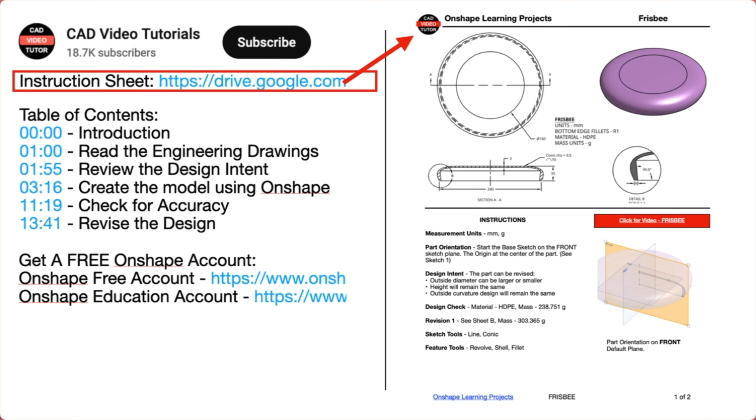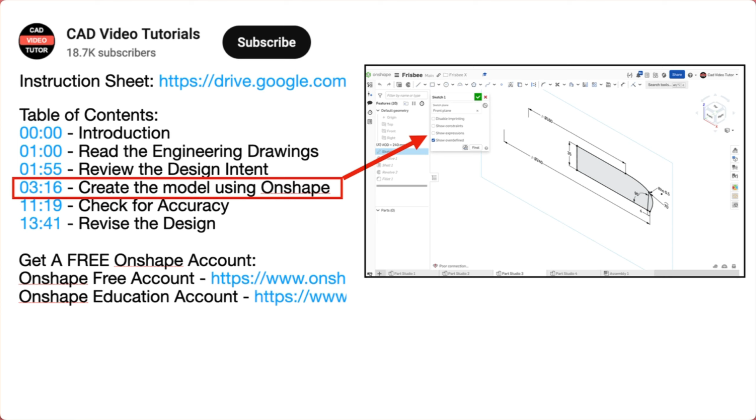The video instruction is organized into 5 segments. In Segment 1, you will read the engineering drawings. Segment 2 will establish the design intent. In Segment 3, you will create the part model using Onshape. Next, you will check the accuracy of your model by checking its mass properties. Last, you will check the design intent by making changes to the model to see if it will update correctly. Now you are ready to begin the project.

In this segment, we'll read the engineering drawing for this Frisbee. Let's start by identifying the views provided in the drawings. First, there is an isometric view showing the Frisbee as a 3-dimensional pictorial. Next, 2 orthographic views. On the upper left is a top view. Aligned below this is a front view.

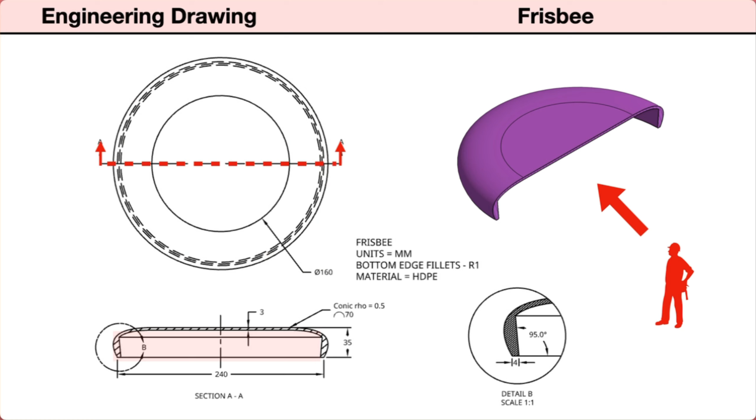This view is displayed as a section view, showing the Frisbee cut in half, exposing an interior profile of the part. The cutting plane line in the top view identifies the location and direction of the section view. To the right is a detail view. This shows an enlarged view of the front section, allowing us to view the details of the curved outer edge.

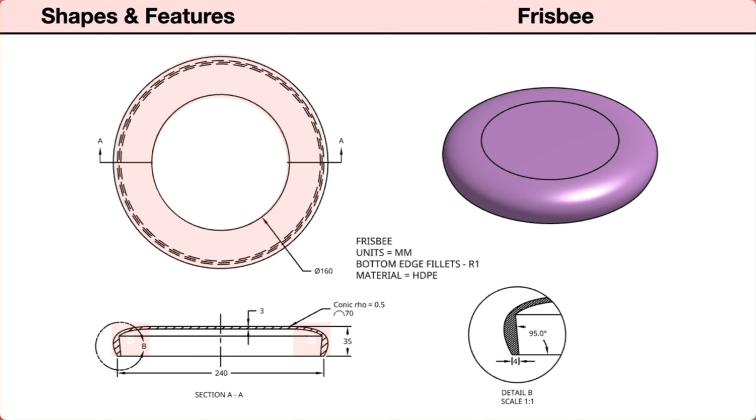When planning a parametric model, we first need to identify its basic shapes and included features. The top view shows the Frisbee has a circular shape. The central area is concentric and flat with a uniform thickness. The front section and detail view shows the outer portion as curved but not uniform in thickness. The bottom edges are rounded, forming small fillets.

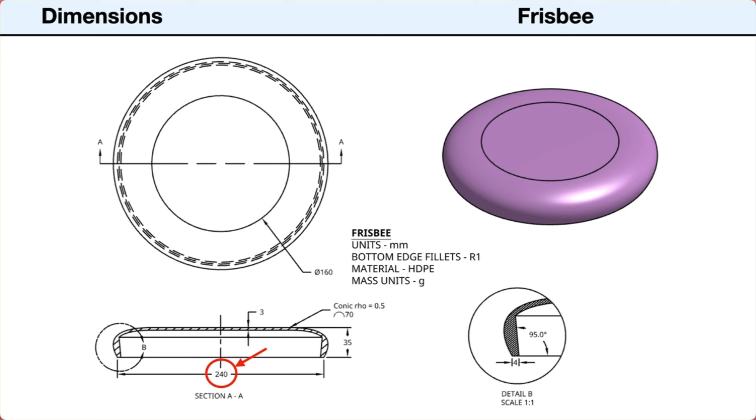Next, we'll look at the dimensions and notes. First, the dimensions are in millimeters. The dimensions in the top view tell us that the flat circular center area of the Frisbee has a diameter of 160 millimeters. The front view shows the height of the Frisbee is 35 millimeters. The bottom outside edge has a diameter of 240 millimeters. The top part has a thickness of 3 millimeters.

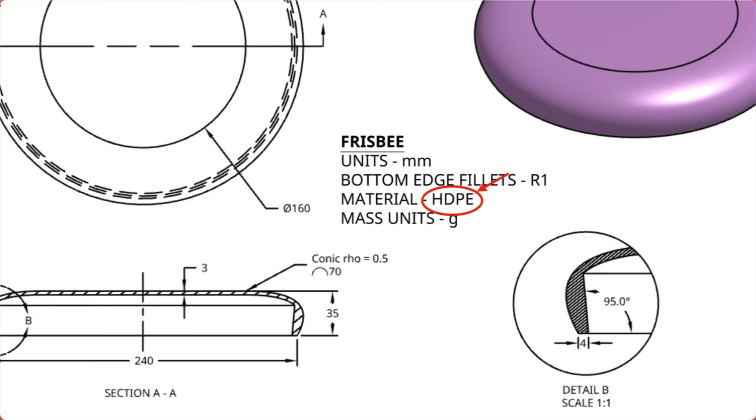The outside curve is a conic arc with a rho value of 0.5, which makes it a parabolic curve and has arc value of 70. The detail view shows the bottom edge with a width of 4 millimeters, and the inside edge angled at 95 degrees. The bottom edges are rounded with a 1 millimeter radius fillet. The material is HDPE, high-density polyethylene. The mass units are in grams.

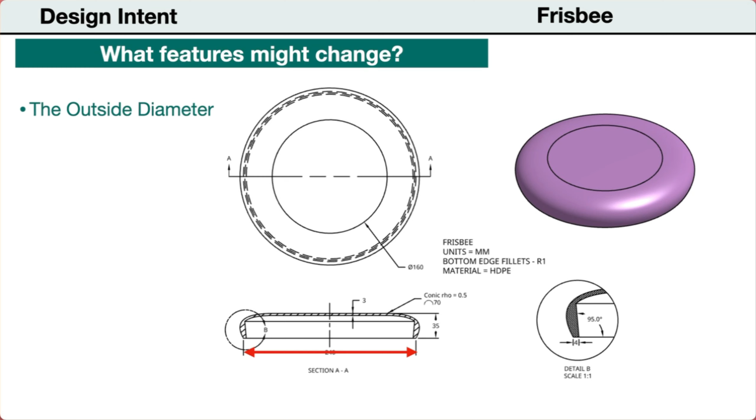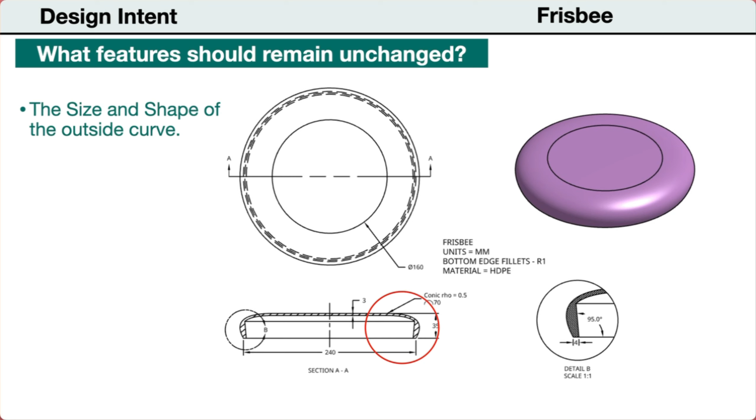Next, let's establish our design intent. To start, we need to identify any features that might be changed during the design process. We might want to make the Frisbee larger or smaller by changing the outside diameter. When the outside diameter changes, we want the inside flat diameter to change by the same amount. So which features should not be changed when the part is revised? The shape and size of the curve on the outside edge, and the material thickness.

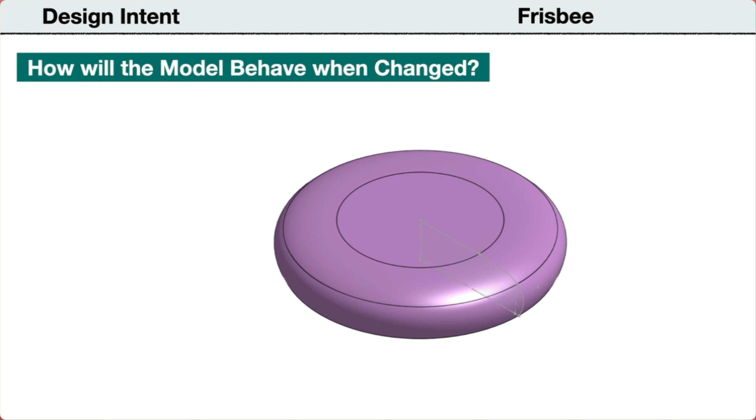So how do we want the part to behave when these parameters are changed? If the outside diameter is increased, or if the outside diameter is reduced, both the outside diameter and the inside flat diameter will change by the same amount. The outside curve will remain the same, and the Frisbee will update without errors.

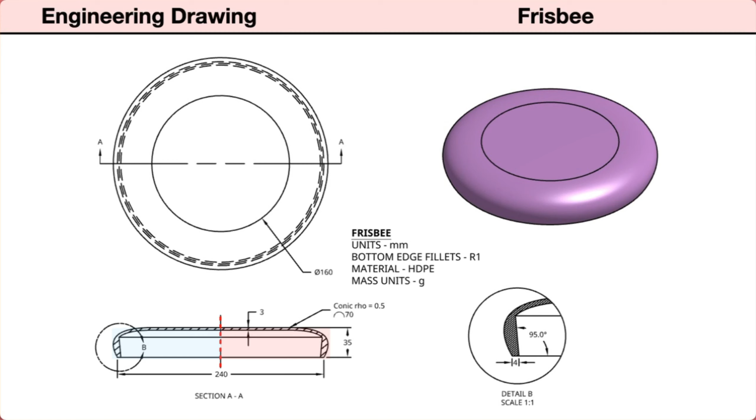Before we model the part in Onshape, let's preview the steps in the modeling process. First, from the drawing, we will identify the profile we will use for the base sketch. Because this part is circular and symmetrical, we can use half of this front section profile as our base sketch. We will place this on the front sketch plane, with the origin at the center.

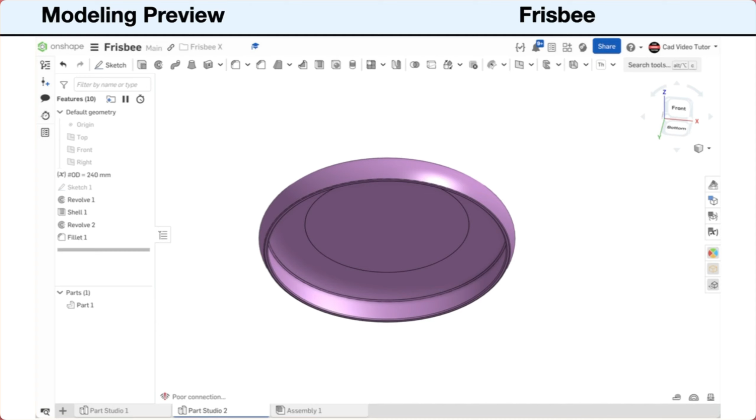We will use the sketch to revolve the Frisbee first as a solid part. We can then use shell to hollow out the inside to a uniform thickness. We will use sketch 1 again with revolve to add the extra thickness and angled inside around the edge. Last, use fillet to round the corners on the bottom edges, resulting in the finished part.

So now let's get started in creating the Frisbee. I have started a new Onshape document and named it Frisbee. The workspace units are set to millimeters and the mass is set to grams.

Start a new sketch and choose the front sketch plane. Use N to view the sketch normal to the screen. Use P to turn off the visibility of the sketch planes. We will start with a construction line at the center of the part. Click on Line and Construction. Click on the origin to start the line and stretch it vertical. Enter 35 millimeters for the height.

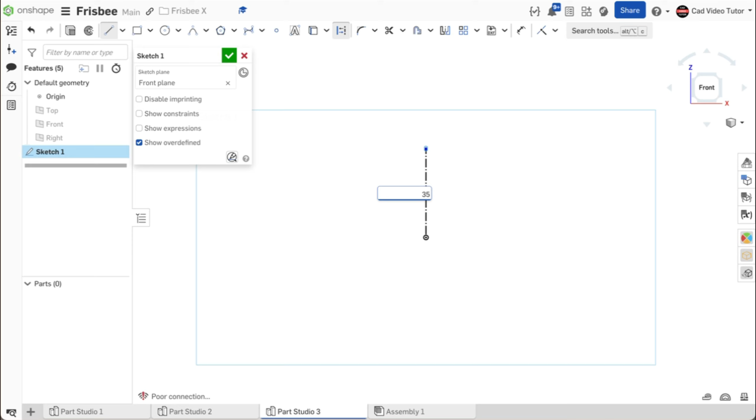Right-click and End Line. Now, click on Line from the Sketch toolbar. Click Coincident to the origin and stretch a line to the left for the bottom edge. Right-click and End Line. Use the dimension tool and click on the end of the line and then the center line. Move the mouse to the left of the center line and click for the diameter. Enter 240 millimeters for the diameter.

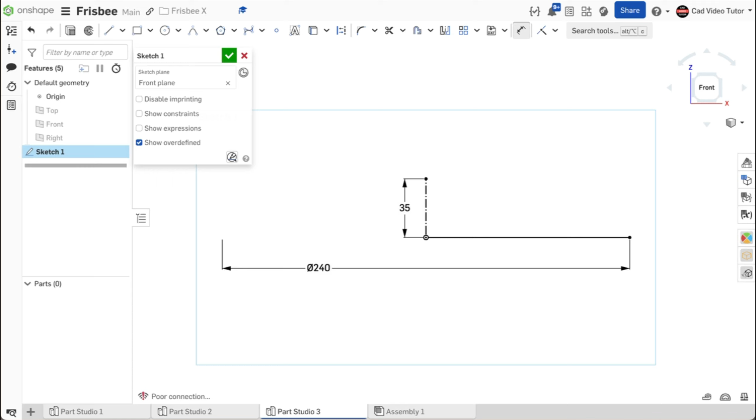We know from our design intent that this diameter may change, so let's set it as a variable. Double-click on the dimension and then use hashtag from the keyboard. Click on New Variable. Enter the name as OD for outside diameter. Use the green check to close. Use Enter to apply the variable to the dimension.

Now for the horizontal line at the top of the Frisbee. Click on Line and start coincident with the top point of the center line. Stretch the line to the left. Right-click and End Line. Use the Dimension tool. Use the center line to also set this value as a diameter. Enter 160 millimeters. This line will also be variable, but it should change by the same amount as the OD variable when it is changed.

We can set this relationship with a formula. Double-click on this dimension and enter hashtag from the keyboard. Choose OD from the variable list. This line is 160 millimeters, which is 80 millimeters smaller than the OD. So after the OD variable, enter minus 80 millimeters. Use Enter to apply the formula. Now as we change the OD variable, this line will also change, maintaining the relationship.

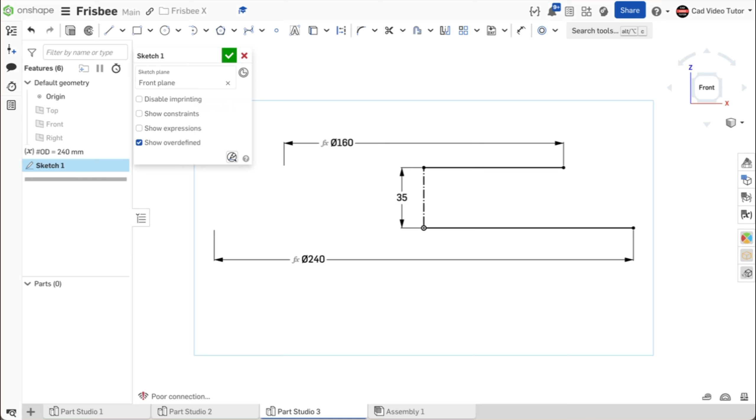Now we can create the conic arc that makes the curve on the outside. From the Sketch toolbar, choose Conic from the Arc drop-down menu. Click coincident to the end of the top line and coincident to the end of the bottom line. Stretch the arc outward and look for a horizontal icon and the rho value to be 0.5. Click to set the arc and use Enter to accept the rho value.

Now we can sketch the angled line that will add thickness to the inside edge. Click on Line and then coincident to the bottom line near the outside edge, and end coincident to the curve. Use the Dimension tool to set the distance from the outside edge at 4 millimeters. Set the angle to 95 degrees.

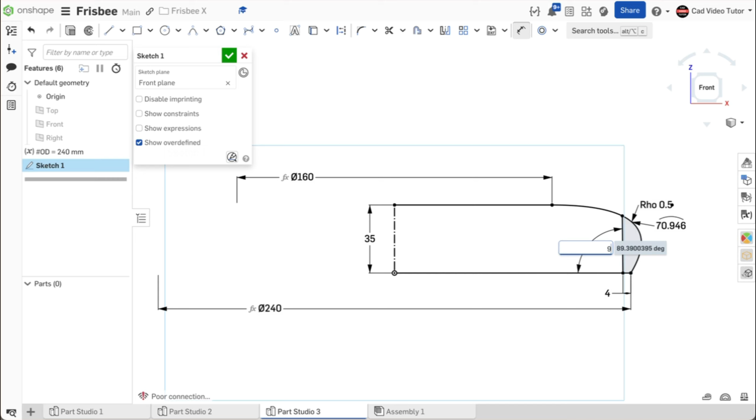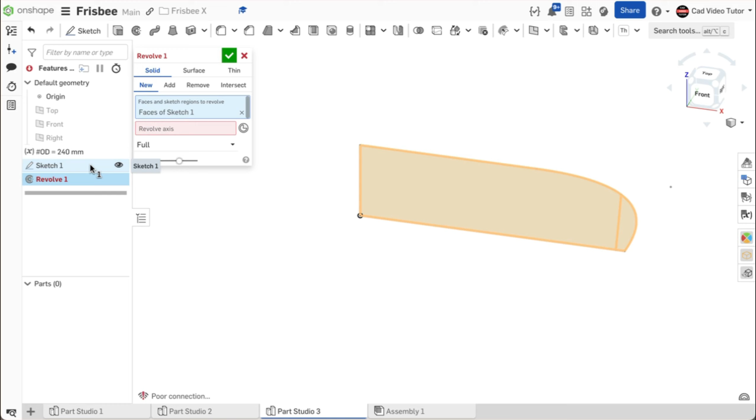Last, to use this sketch for our first revolve, we need to close the region. Use a line to connect the ends at the center. This looks right. Use the green check to close. We can now use this base sketch to revolve a solid Frisbee shape. Click on Revolve on the Feature toolbar. For the sketch region, click on Sketch 1 from the feature list. For the revolve axis, click on the line at the center. This looks good. Use the green check to close.

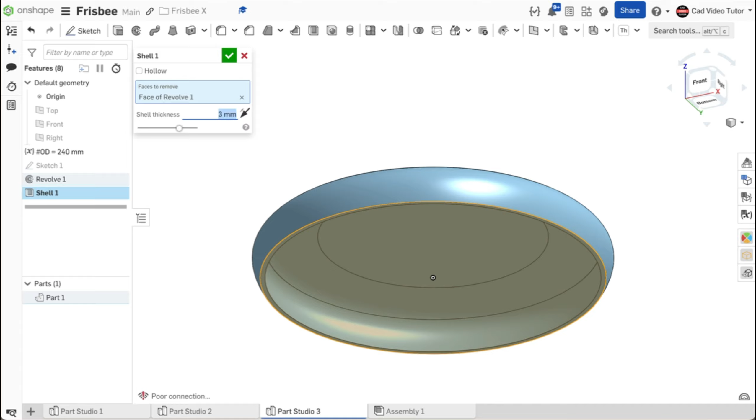We can now use Shell to hollow out the inside and create a uniform thickness. Click on Shell on the Feature toolbar. For the face to remove, click on the bottom face of the Frisbee. For the shell thickness, enter 3 millimeters. This looks correct. Use the green check to close.

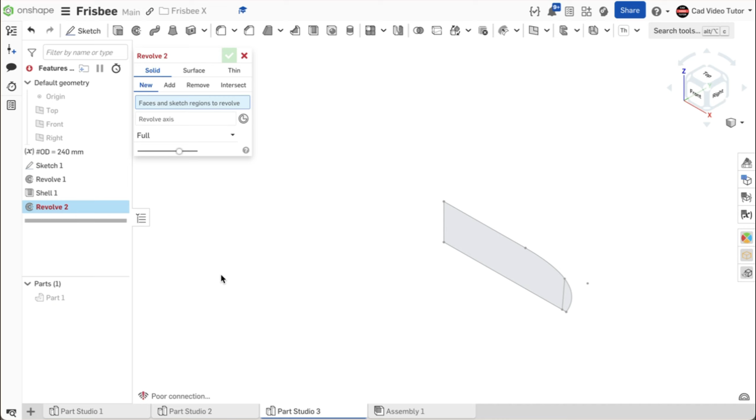To add the material for the angled inside face of the Frisbee, we will use another revolve. Click on Revolve on the Feature toolbar. Click on the eye on Sketch 1 on the feature list to turn on its visibility. Click on the eye on the part in the parts list to turn off its visibility so we can see the sketch. Now, click on the region of the sketch with the angled line.

For the revolve axis, click on the line at the center of the sketch. Click on Add to join this with the existing part. Turn on the visibility of the part. Check the box for Merge with All.

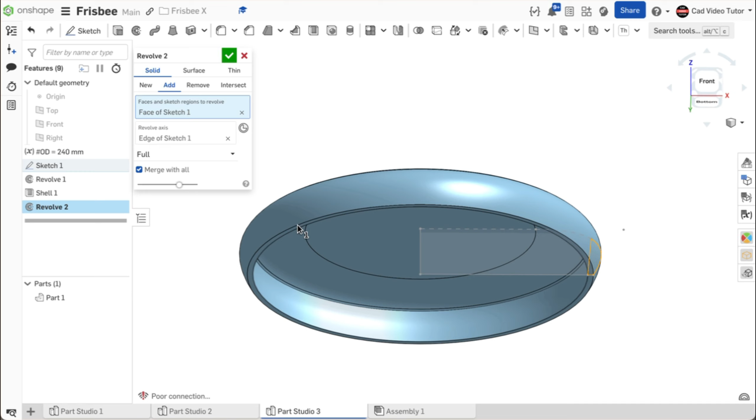This looks like what I want. Use the green check to close. Last, we need to round the bottom edges using a fillet.

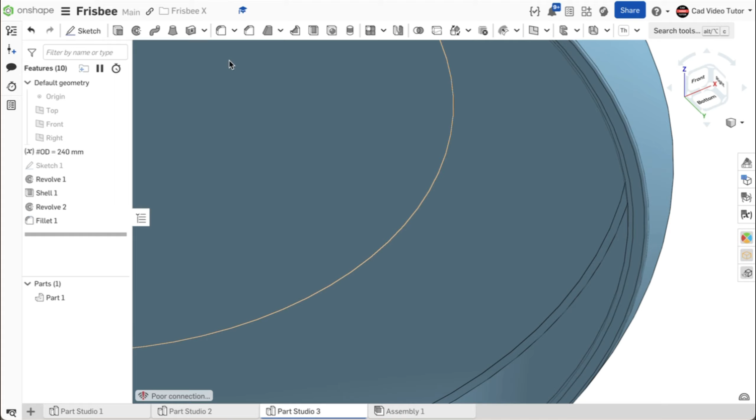Click on Fillet on the Feature toolbar. Set the fillet radius at 1 millimeter. Click on each of the bottom edges of the Frisbee to round them. Use the green check to close. This looks good. The model of the Frisbee is now complete.

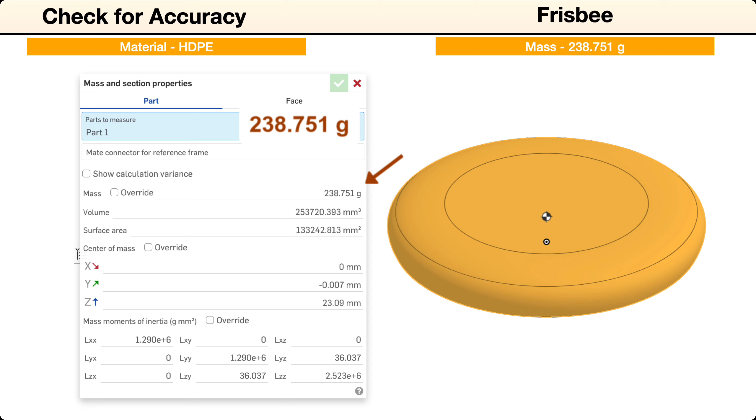In this segment, we'll check the accuracy of the model by checking its mass properties. To check the model, the mass units should be set to grams and the material set to HDPE plastic. If the size and shape of your model was completed accurately, the mass should be 238.751 grams. Let's look at this process step by step.

First, open the document that contains the model of the Frisbee. Next, check the workspace units and make sure that mass was set to grams. Next, set the material to HDPE, high-density polyethylene. Go to the part in the parts list. Right-click and choose Assign Material. In this case, we're searching for HDPE with a density of 0.001.

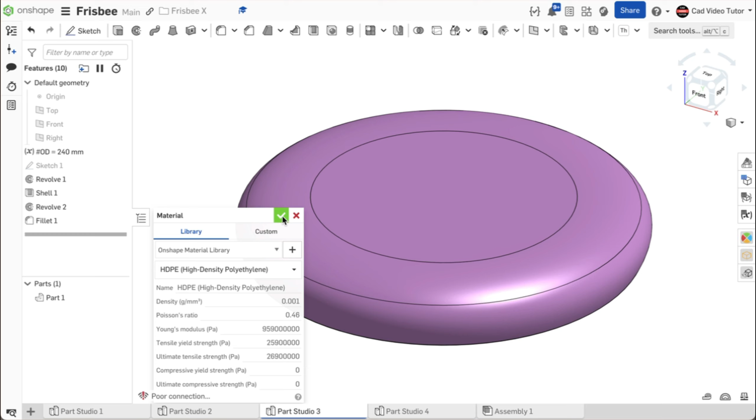Click to select it. Next, go down to the lower right corner and click on the Display Mass Properties button. When the dialog box opens, click on the part, and the display shows a mass of 238.751 grams. If this was your result, then your part is accurate and matches the specifications. If not, we can troubleshoot to locate the sketch or feature that has an error.

First, locate the rollback bar in the feature list. Move the rollback bar up to just below Revolve 1. The mass now reads 1,489.796 grams. If you have an error here, examine Sketch 1.

Now move the rollback bar down to below Shell 1. This removes material to hollow out the Frisbee. The mass is now 187.204 grams. If you have an error here, examine Shell 1 and the shell thickness setting.

Now move the rollback bar down to below Revolve 2. This adds material for the angled inside edge of the Frisbee. The mass is now 238.952 grams. If you have an error here, examine Sketch 1.

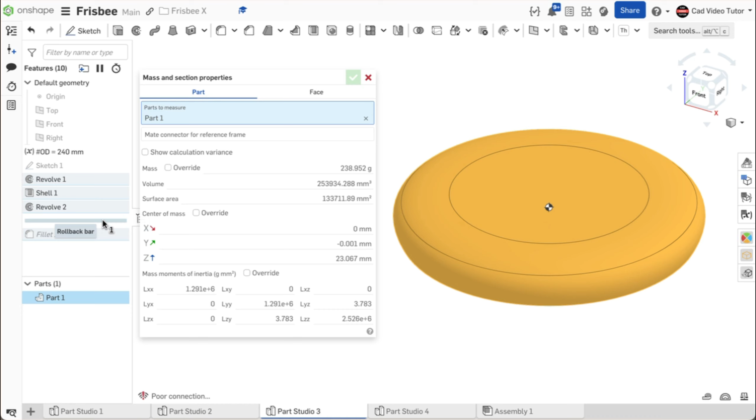Now move the rollback bar down to the end. The mass is now 238.751 grams. If you have an error here, examine the settings in Fillet 1. You should now have found any errors and your part is accurate to the specifications.

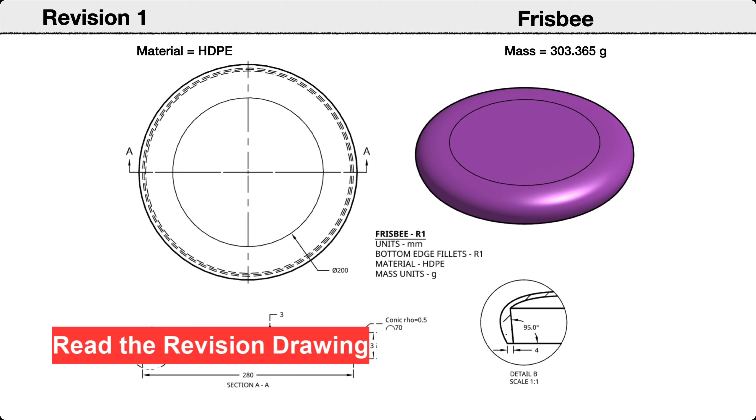In this segment, we will make some revisions to the part and check if our design intent has been applied correctly. We will start by reading the revision drawing to identify the features that will be changed. First, the Frisbee is now bigger. The outside diameter at the bottom is 280 millimeters. This is an increase of 40 millimeters.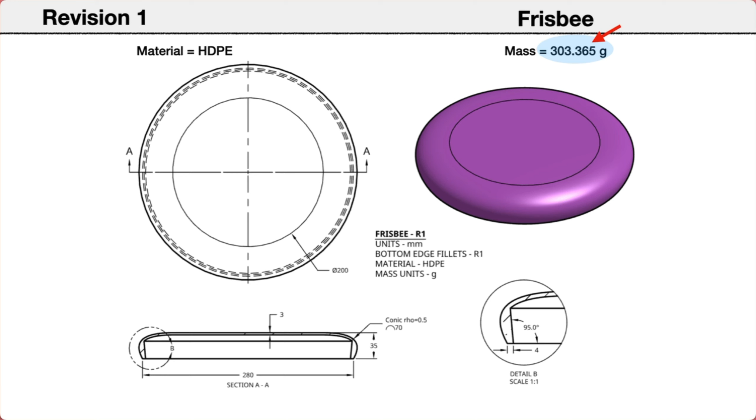With this change, the diameter of the flat inner area on the top surface of the Frisbee has increased by the same amount to 200 millimeters. If the part updates correctly, the revised mass should now be 303.365 grams. Now we will make the revisions to the Frisbee. I have opened the Onshape document that contains the part.

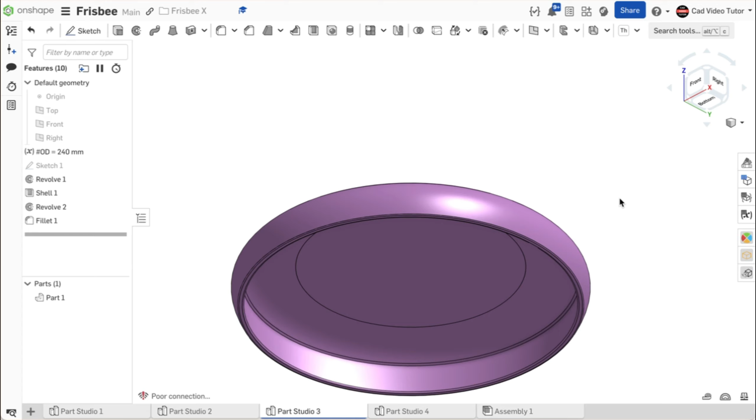In our design intent, we anticipated that the diameter of the Frisbee would change. So we set the bottom outside diameter as a variable, naming it OD for outside diameter. We also reference the same variable in a formula determining the diameter of the flat area on the top surface. When the bottom diameter changes, the top should change by the same amount.

To change the variable value to make the revision, click on the button for the variable table on the right. Double-click on the value of the OD, which is the bottom outside diameter. Change it to 280 millimeters. I can see that the Frisbee updates without errors. Let's take a couple of measurements to check its new size.

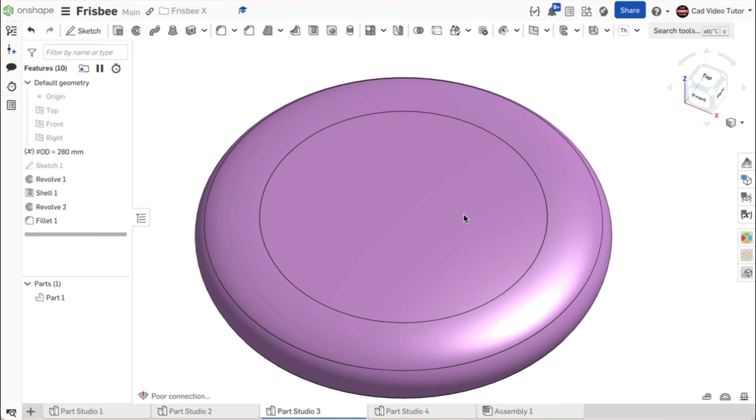Use the rollback bar to remove the fillets so we can accurately measure the bottom diameter. Click on the Measure tool and click on the bottom outside diameter. This shows the diameter at 280 millimeters. Good. Use the space bar to cancel the selection. Now click on the line for the flat on the top surface. This now reads 200 millimeters, which is the correct amount.

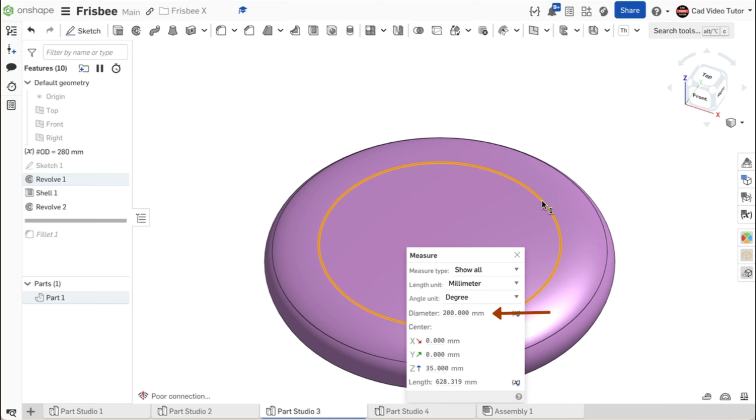Close the Measure tool. In the feature list, right-click on the rollback bar and click Roll to End. Now click on the Mass Properties button on the lower right. Click on the Frisbee. The revised mass should now read 303.365 grams. Congratulations! If you got the same results, your Frisbee has been revised correctly and met our design intent.